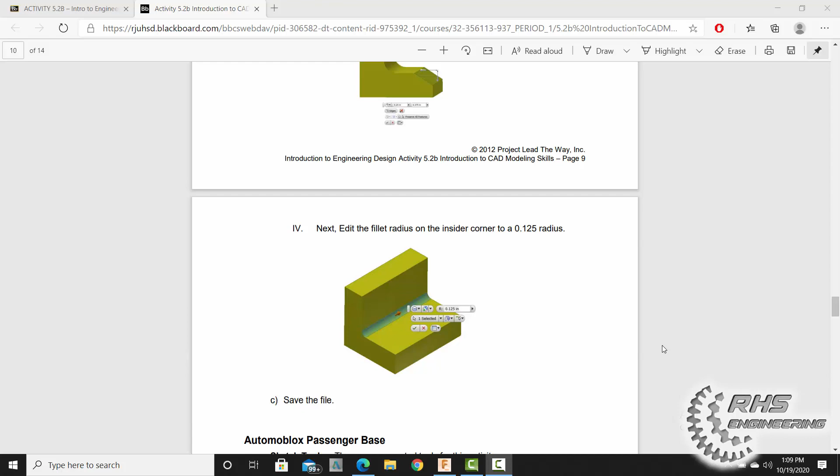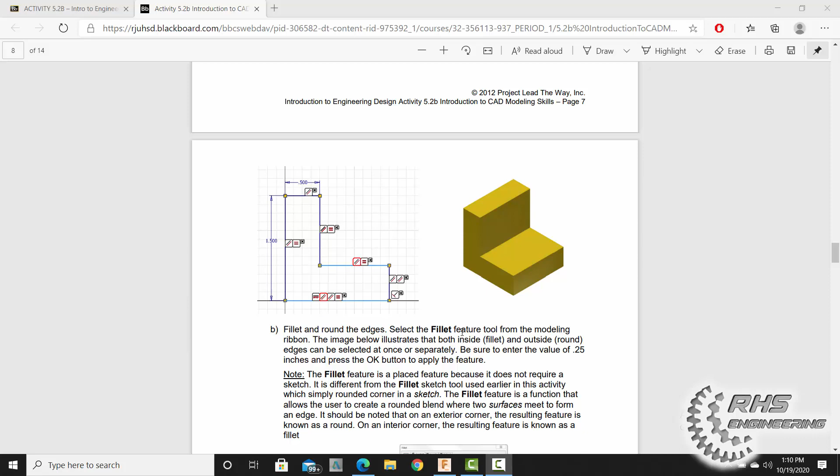Today we're going to get some practice making some chamfers and fillets on a pretty simple part here. But first, we're going to get some practice with geometric constraints here. So in our assignment, we've got to draw this out, a 2D sketch with the following 2D constraints. All right, so whenever you're ready, let's head over to Fusion 360 and get started.

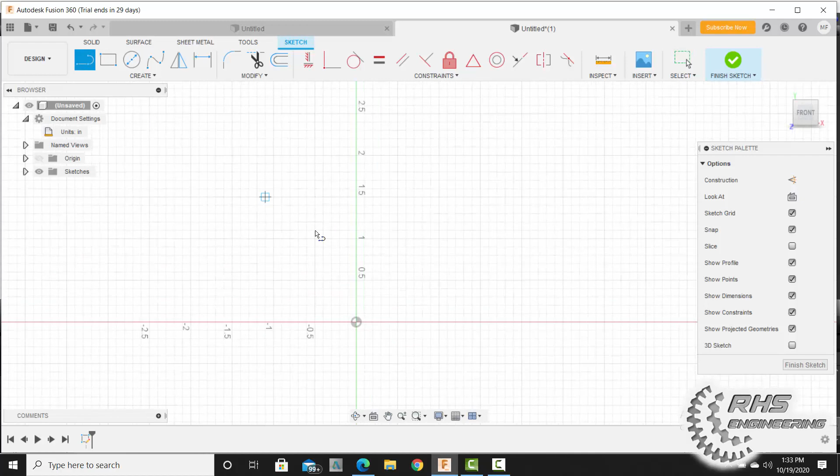All right, so the first thing you want to do is go on up and start a new design. And make sure you're in inches here. Hit OK. And as we always do, let's start a sketch here on our XY plane. I'm going to zoom in a bit here. And we need to first draw out a line that's 1.5 inches in height. So I'm going to just come on up here, type in 1.5, hit enter, come grab my line tool again, come across, and we need to make another line here that is 0.5 inches across.

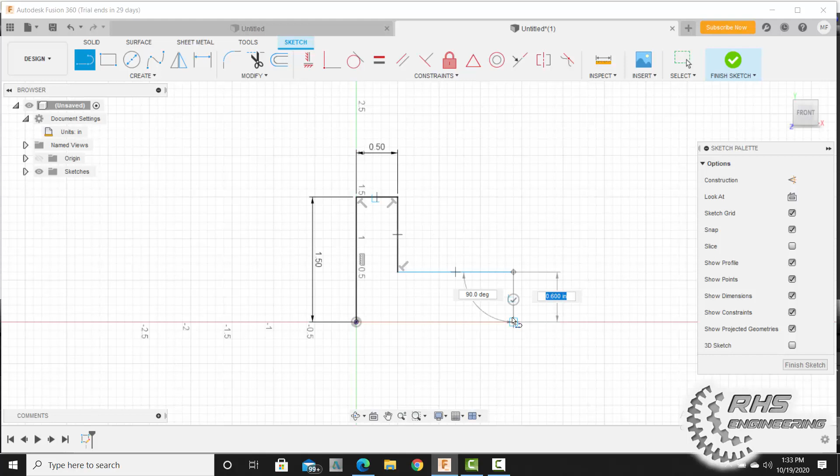And then I'm going to grab my line tool, and the rest of the part, we're just going to sort of eyeball it. We're just going to drag out the shape, and here we go. All right, so when you're done, you should have something that looks like this, hopefully. I'm going to hit escape.

Now, when you drew it, you probably drew it out and you added some constraints. But for this assignment, let's go ahead and delete these constraints. And remember, constraints are things that sort of lock our drawings or our sketching lines into place so they don't move. All right, but let's delete all of our geometric constraints. Delete. So the only thing we have now are dimensional constraints here, 0.5 and 1.5. All of our other geometric constraints are now deleted.

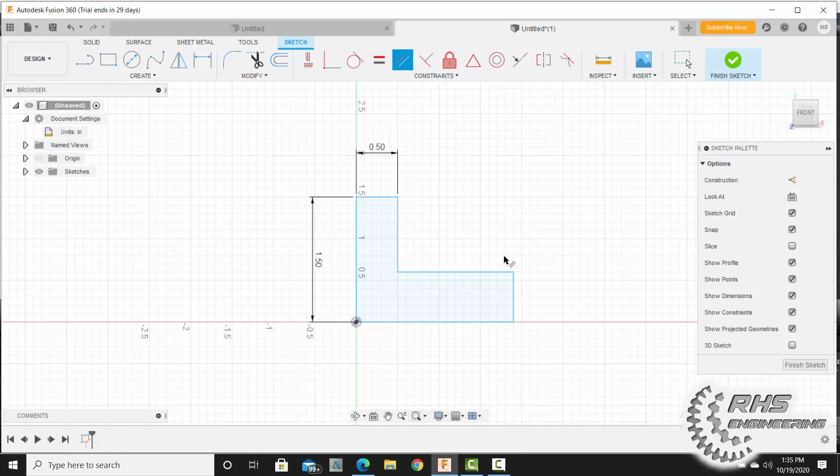Now I'm going to go back to the assignment, and according to our assignment, we need to add the following geometric constraints. All right, so let's go do that. Let's go back to Fusion 360. So the first thing I'm going to do is put in all the parallel constraints. I want to make this line parallel with this line and any other vertical line on here. So I'm going to make this one now parallel with this one. And I think that's good for our

vertical lines, but now we need to add some parallel constraints to our horizontal lines. So I'm going to click on this line. I'm going to add one here and add one here. I'm also going to make this one, click here and click here, parallel to that one. I'm going to go ahead and hit escape so I am out of parallel constraint mode.

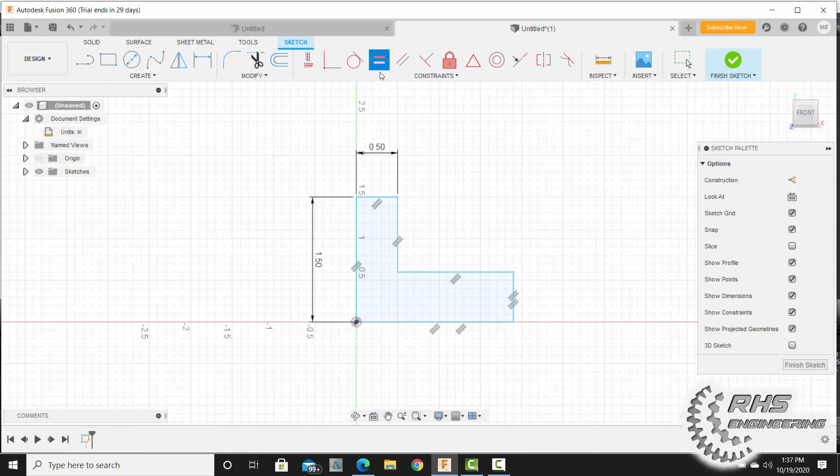Now let's go ahead and add those equal constraints. So we want to make the lines equal. So I'm going to come up here to my equal geometric constraint. I want to make this one right here the same length as this one, or equal to this line. So I'm going to hit equal. And I want to make this one here equal to that one. I want to add one more equal constraint. Click here and then click there. And that'll do it for our equal constraints. I'm going to hit escape.

And now we're going to add one perpendicular constraint, or a 90-degree constraint. So let's go ahead and click on it. And when we say something's perpendicular, that also means it's orthogonal or 90 degrees. So these lines are 90 degrees or perpendicular to one another. So I'm going to click here, I'm going to click here, and notice my perpendicular constraint pops up. I'm going to hit escape now.

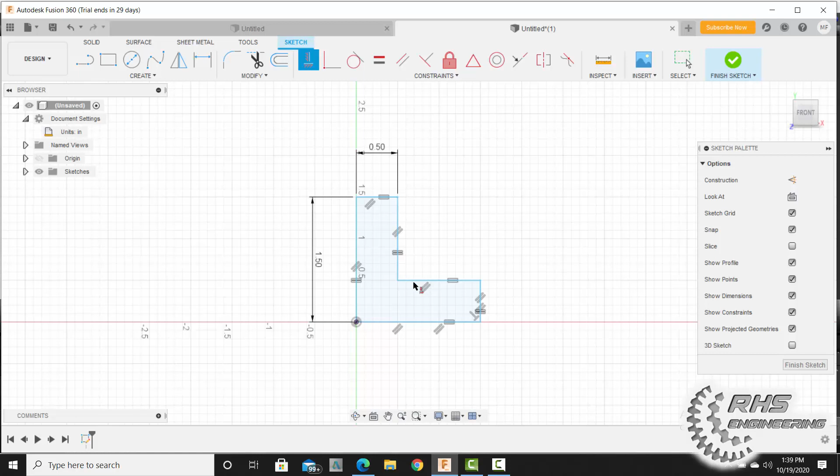And now I'm going to make our last constraint. I'm going to come on up here to my horizontal and vertical constraint. And I'm simply going to click on this bottom line and make sure it's horizontal with this constraint. Now notice here it is fully constrained, and we're good. Hit escape. If you're in my class, please take a screen snippet of this when you are done, complete with all these super cool geometric constraints that you added to it. All right.

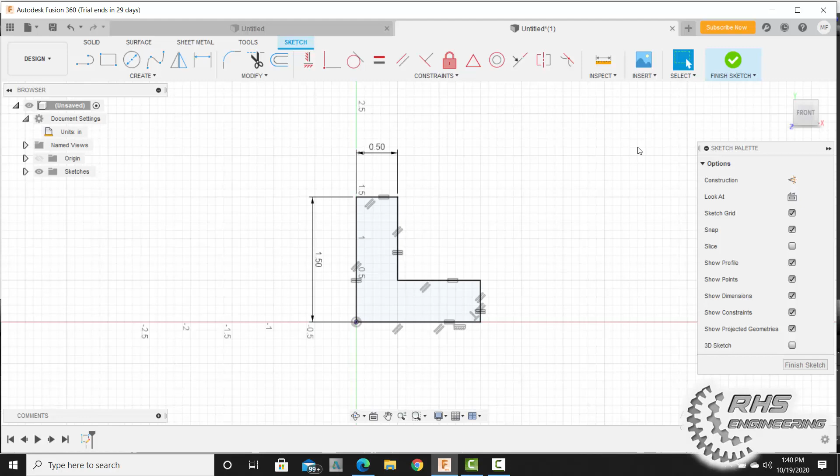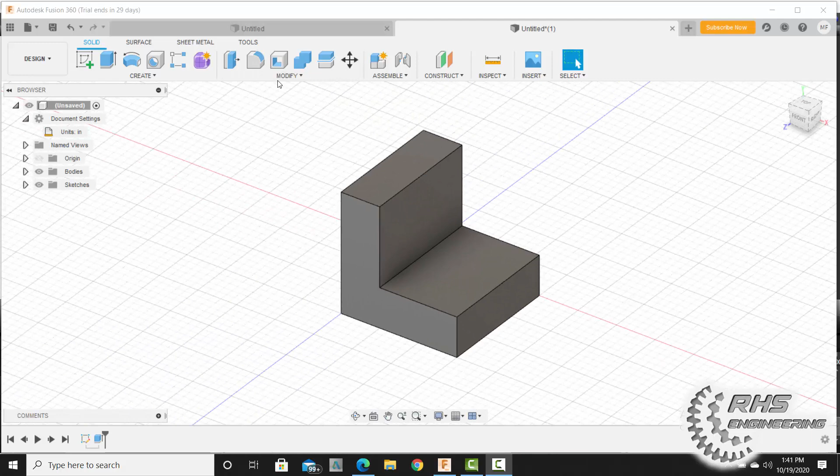Now let's go ahead and finish our sketch. And we're going to extrude this L-shaped looking thing here out a distance of 1.5 inches and hit OK. Now we want to go ahead and add a fillet to the corners here. So I'm going to click on the fillet button, and we want to add a fillet on this edge and this edge, and we're going to type the fillet radius to be 0.25 inches, and then hit OK. And go ahead now and save this as fillet. And if you're in my class, please also take a screen snippet of this guy.

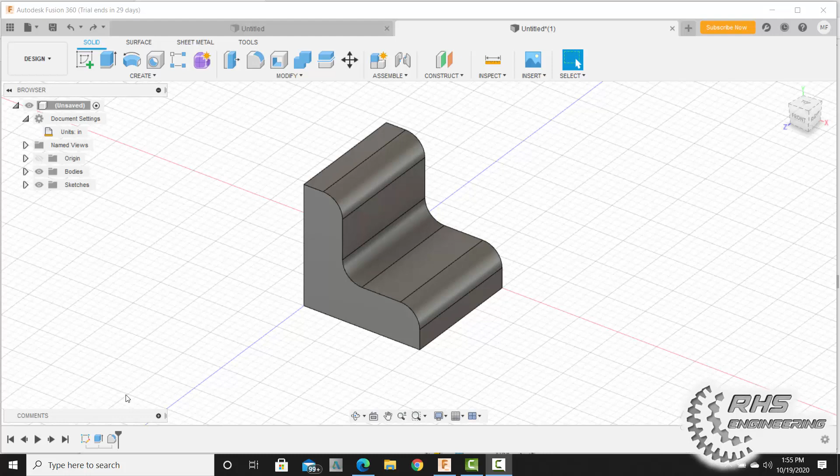And once you've saved it, we're going to go ahead and change things a little bit so we can add some chamfers. So I'm going to go ahead now and edit. Click on your fillet down here, and we're going to edit that feature. I'm going to X out of them, and then I'm going to keep a fillet right here in that corner, but it's going to be 0.125 instead of 0.25, and I'm going to hit OK.

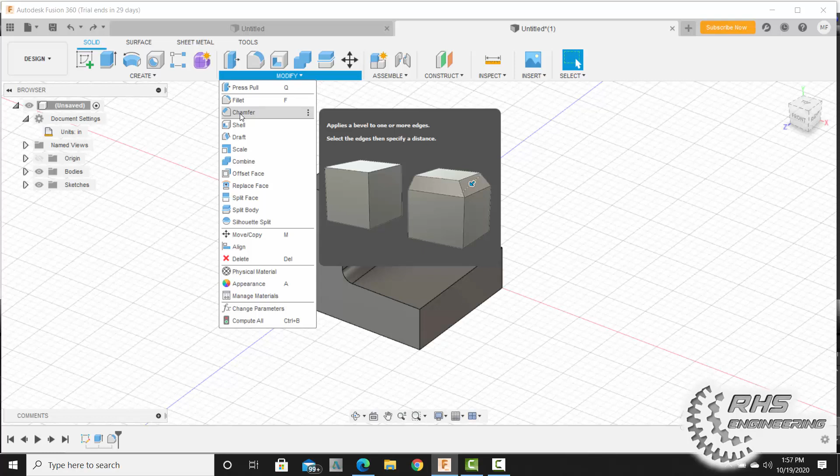And now we're going to add what's known as a chamfer. It's like a beveled, angled edge on a corner. So I'm going to come over here to chamfer. And what I like about Fusion 360, if you ever just hover over something, it'll give you a description of what that item or feature is. So I'm going to click chamfer, and I'm going to put a chamfer right on that edge, and it's going to have a 1/8 or 0.125 chamfer on it. And I'm going to select OK.

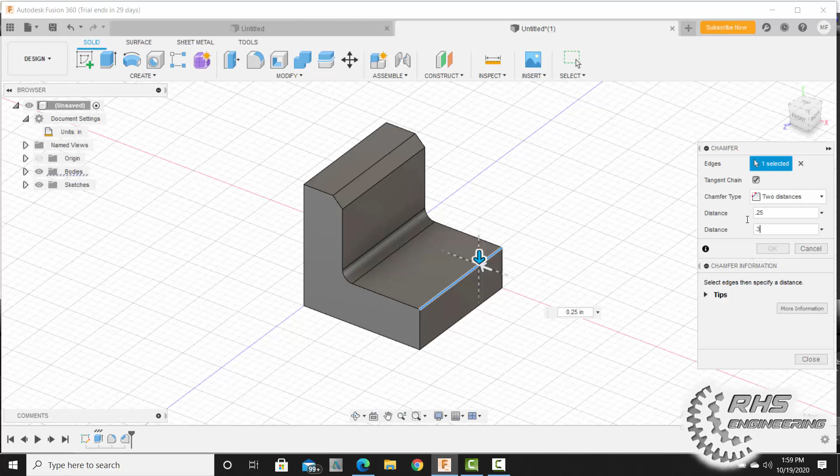And then for our second chamfer, let's come back up to chamfer and select it. We're going to put a chamfer on this edge right here. Unlike that time though, we're going to use two distances, and we're going to click there. And our top distance here is going to be 0.25. I'm going to hit the tab button. And for our other distance, it's going to be 3/8 or 0.375. And I'm going to hit OK. When you're done, go ahead now and save the file as chamfer or whatever you want to save it as.